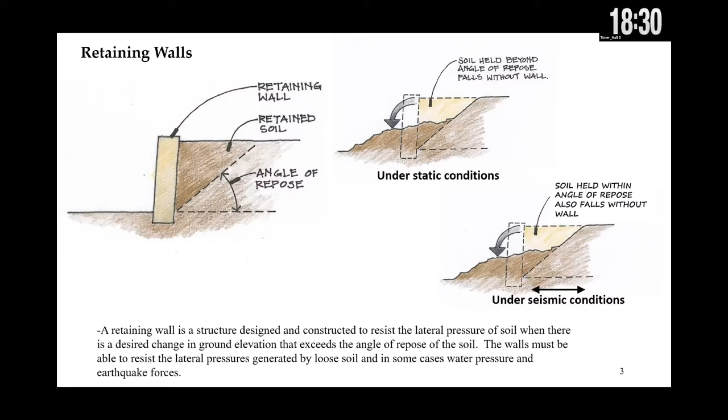Now coming to the static forces acting on a retaining wall, I am showing you a very simple example of a retaining wall where you have different kinds of forces acting. One of the major forces is soil pressure. The soil being retained by the wall actually tries to push the facing of the wall. Because of that, you have lateral earth pressure acting. Typically, as per Rankine's theory, we assume the distribution of this pressure to be triangular.

If you want to find the resultant force acting on the wall due to soil pressure, we take the area of this triangle, half of base into height, and it acts at a height of h/3 from the base. If you have some surcharge acting on the retaining wall, the resultant will be a rectangular distribution with magnitude equal to the coefficient of earth pressure into the amount of uniform surcharge pressure, equal at all elevations, and the area of this rectangle gives the resultant thrust due to the surcharge pressure. And if you have live loads acting on the retaining wall, you need to assume the Boussinesq or Westergaard stress distribution theories.

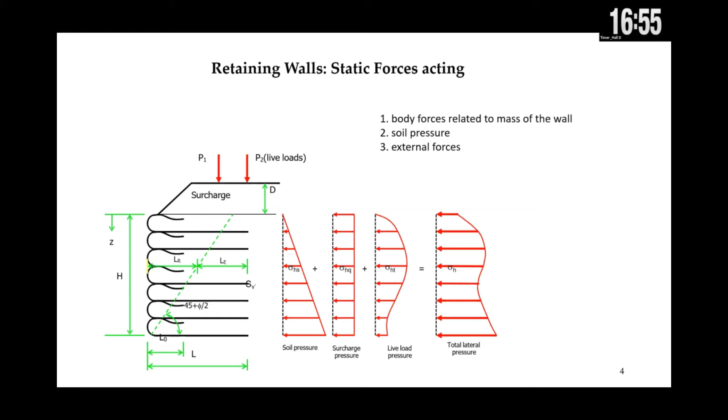We derive the earth pressure distributions below the live loads, and we compute the resultant thrust due to these live loads. Then we calculate the total pressure as a combination of all these pressures.

When we have seismic forces, the extra force that comes onto the retaining wall is due to the horizontal and vertical forces from the earthquake. Usually in a pseudostatic analysis, we take the horizontal force as kh into W, where kh is the horizontal seismic coefficient and W is the weight of the soil wedge, which is the failure or active wedge. The vertical force will be kV into W, where kV is the coefficient of vertical acceleration.

Now what happens with a reinforced retaining wall? If you do not have reinforcement, in most cases these horizontal pressures push the retaining wall forward - one due to soil pressure, one due to live load, another due to surcharge pressure - and on top you have the seismic force pushing the wall. You need to find a mechanism to hold this wall back.

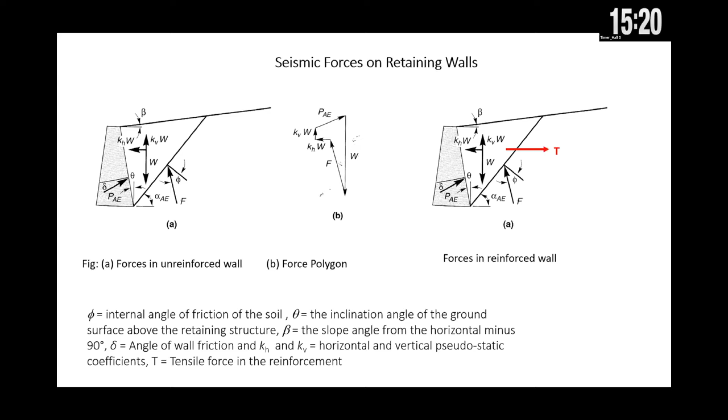This is possible if you include tensile elements into the retaining wall in the form of reinforcement. With layers of reinforcement embedded into the backfill, you can compute the total tensile force, which will try to push the retaining wall back into its original position. This is where reinforcement comes into the picture for seismic stability of a retaining wall.

Now, how does an earthquake force act? Earthquake force is actually an inertial force. Since any structure is usually under stable equilibrium, the earthquake force comes and shakes it at the ground level, and the structure has its own rigidity or inertia to oppose this movement. Because of this, the components of the structure are subjected to different levels of displacement - this is what we call the inertial force effect.

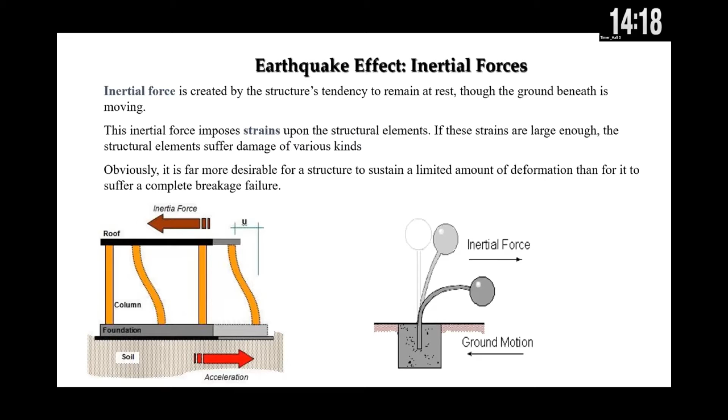To sustain this inertial force due to earthquake, the structure has to be as flexible as possible. If the structure is extremely rigid, it will undergo enormous displacements, whereas if it is flexible, the displacements will be limited, and the structure will have the flexibility to sustain the deformations.

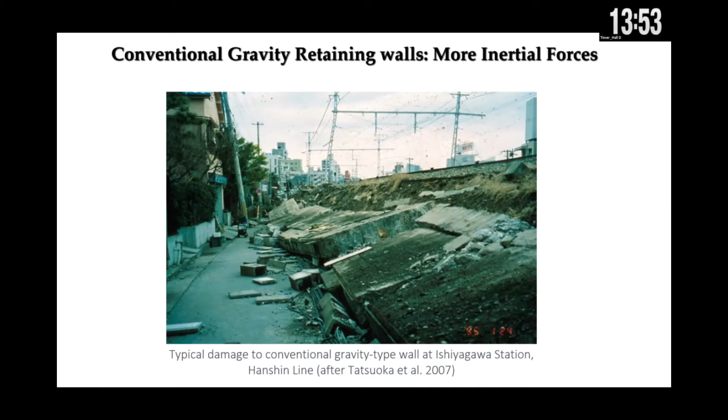This is a picture of a conventional type gravity retaining wall in Japan, which was damaged severely in 1995 because of an earthquake. Conventional gravity retaining walls are extremely rigid structures and are not able to displace under the influence of earthquakes - they oppose the deformations, which is why they undergo brittle kind of failure.

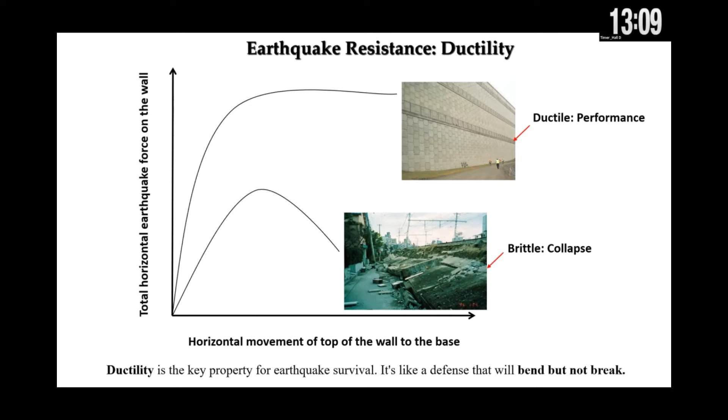So ductility is the key property for earthquake survival, and most reinforced retaining wall structures are extremely ductile compared to conventional gravity type retaining walls.

Take a GRS wall, short for geosynthetic reinforced soil wall. A GRS wall reacts to earthquake in a very flexible manner. This is analogous to a ship floating on a wave - in an ocean or sea, if a huge wave passes and the ship is passing, we can think of this boat actually moving on the wave, and it moves along the wave. When the wave recedes, it comes back to its equilibrium position.

A similar thing happens in the geosynthetic reinforced soil wall. When an earthquake passes through the GRS wall, it flexes and undergoes deformations, but these deformations are contained within the structure because it is an extremely flexible structure. Once the earthquake passes, it comes back to its original position.

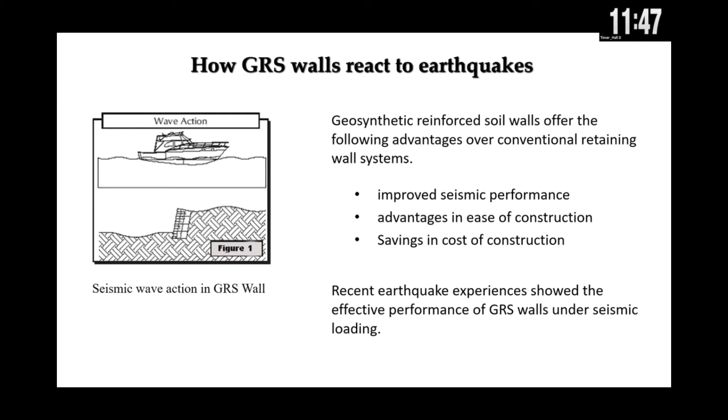So geosynthetic reinforced soil walls have main advantages of improved seismic performance and ease of construction, and also a lot of savings in cost because we are using polymers instead of cement and concrete. Many recent earthquakes show that geosynthetic reinforced soil walls have performed extremely well under seismic conditions.

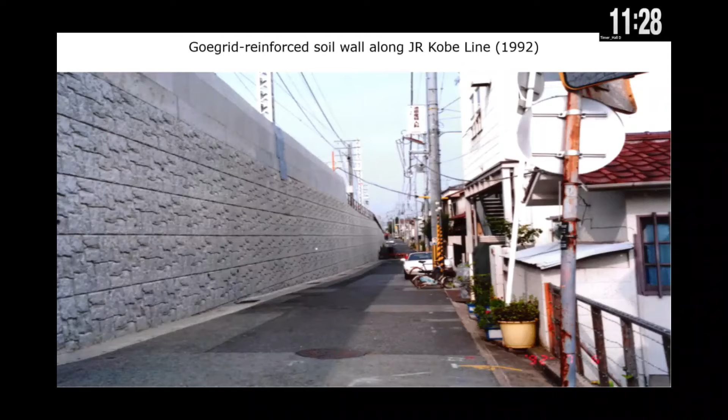One such example is the Kobe earthquake of 1995. There is a geogrid reinforced retaining wall, shown in this picture, which was built for 300 meters long using geogrids, and you can see the panel facing at the front.

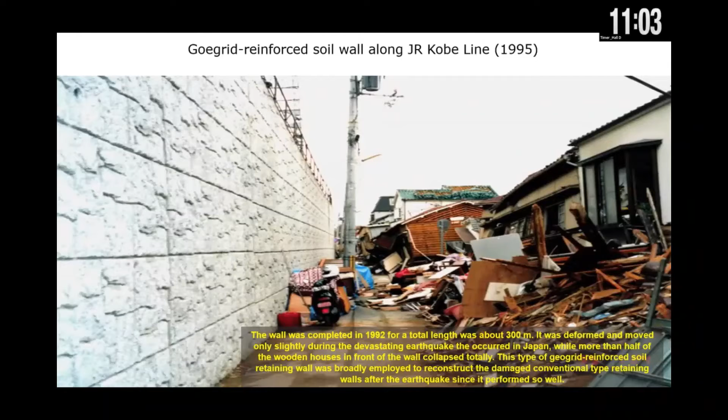So in 1995, there was a devastating earthquake which hit this area, and you can see that all the surrounding buildings collapsed, but the retaining wall, which is made with geogrids, is completely safe. It has undergone very little damage during this earthquake.

This witnesses the seismic performance of reinforced soil structures. Among the studies on seismic response of geosynthetic reinforced soil walls, you have reduced scale model studies, including centrifuge and shaking table studies, field studies, and numerical studies. In this lecture, I will concentrate only on the reduced scale model studies, specifically shaking table studies, which are available in our lab.

In a centrifuge, generally you have NG conditions, because of which you can simulate the field stress conditions exactly in a laboratory model. This is because of the acceleration at which the model rotates, which creates centrifugal forces, due to which the stress conditions within the model are increased several times to be equal to the stress conditions in a prototype.

But in a shaking table model, you have 1G conditions, that is, you are conducting experiments in one gravity condition. So the stresses in the model will not be equal to the stresses in the prototype. To get the stresses in the prototype, you need to use some scaling laws so that you can extrapolate the results from the shaking table studies to field conditions.

Centrifugal studies are very good because they are NG model tests, but they also have serious limitations, like the acceleration field may not be uniform within the model, and there could be grain size effects affecting performance. Shaking table studies, as I mentioned, are 1G model tests, but there are more shaking table studies reported in the literature than centrifuge tests, simply because you can create bigger models in a shaking table compared to a centrifuge. Creation of the model and managing instrumentation is also much easier in a shaking table.

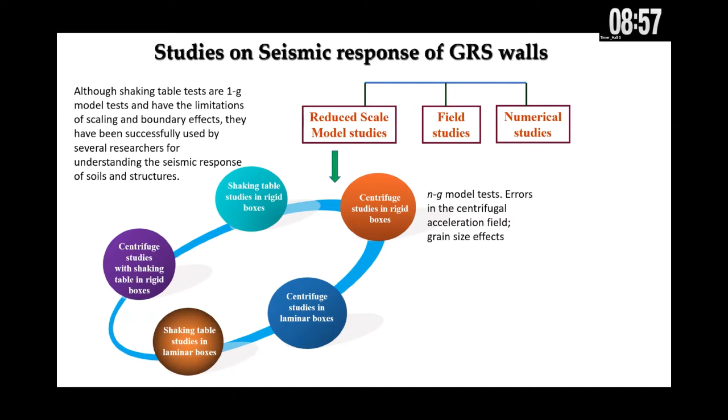All said and done, centrifuge modeling has its own advantage because you don't have to use any scaling factors like in shaking table studies.

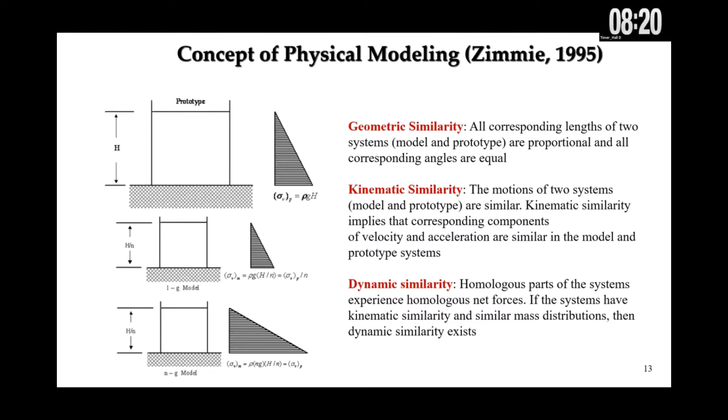The concept of physical modeling, explained by Zimmie in 1995, states that an exactly similar model is created in the lab when three conditions are satisfied. One is geometric similarity, which means the linear dimensions are equally scaled. Kinematic similarity, in which the motions are exactly similar. And dynamic similarity, meaning homologous parts of the systems, both in model and prototype, experience homologous net forces, which is possible if you have kinematic similarity and equal similar mass distributions.

So if you have shaking table model studies, how do you create scaling laws so that the results can be extrapolated to understand the performance of actual prototype structures in the field? There is this scaling factor. A length scaling factor can be defined as the length of a linear dimension scaling factor, which is length of the model by length of the prototype. It's a very simple geometric scaling.

If you want to create a similar scaling factor for force, you go with the dimensional parameters, like force equals gamma into V. So the force scaling parameter would be gamma V of model by gamma into V of prototype, but gamma should be the same for model and prototype. So technically V has dimensions of volume, which is a linear dimension cubed. So the length scaling factor should be multiplied 3 times on itself to get the force scaling factor. This is how you create scaling laws from the basic laws of physics and motion.

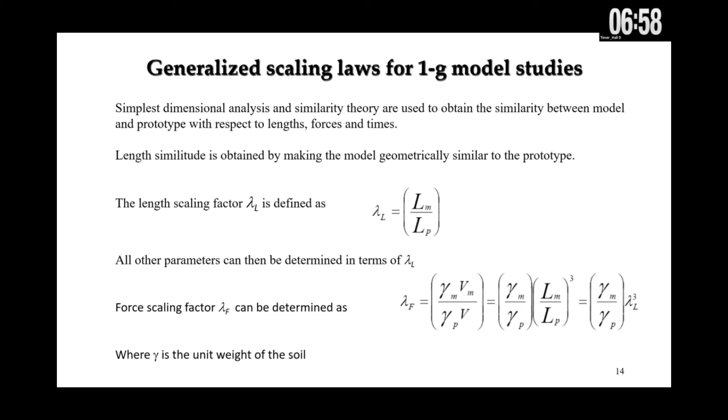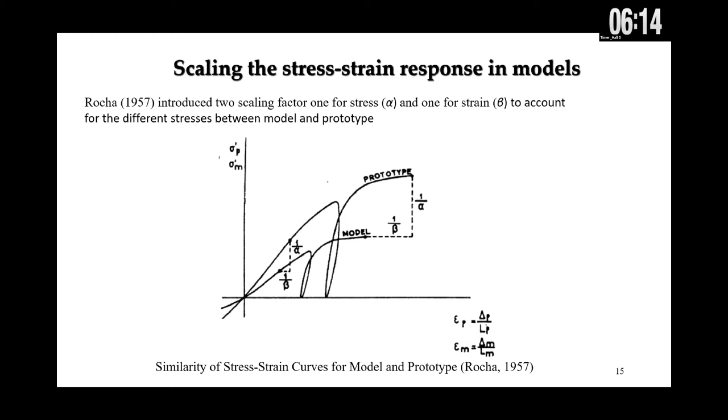There is also a scaling law proposed by Rocha for the stress-strain response of model and prototype. Rocha created two scaling factors: alpha for stress scaling and beta for strain scaling. If you have a stress-strain response under cyclic load for model and prototype, stress and strain in the model are related by alpha, stress in the model and stress in the prototype are related by alpha, and strain in the model and strain in the prototype are related by beta. But this has not become very famous because most of the time this is not such a straightforward linear difference in the scaling of stress and strain between model and prototype.

So the other theory is proposed by Scott. This is a very, very interesting theory based on the critical state of soils.

A critical state or steady state of a soil is the state in which the soil will be undergoing deformation at constant effective stress, constant volume, and constant shear stress. If you have such a critical state, and if you have a void ratio in the model and prototype managed such that they are at equal difference from the steady state, then they both will have the same stress strain response. This is a very interesting theory.

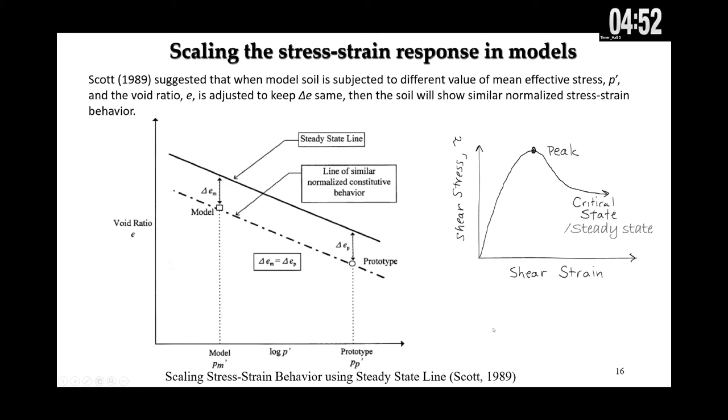If you see this in the plot, you have the steady state line on E versus log P prime. The model and prototype response is plotted exactly parallel to the steady state line, and the difference in void ratio between the model and the steady state line, and between the prototype and the steady state line, is exactly the same. In such a case, the stress strain response of the model will be the same as that of the prototype, which was proved by many other researchers in later days.

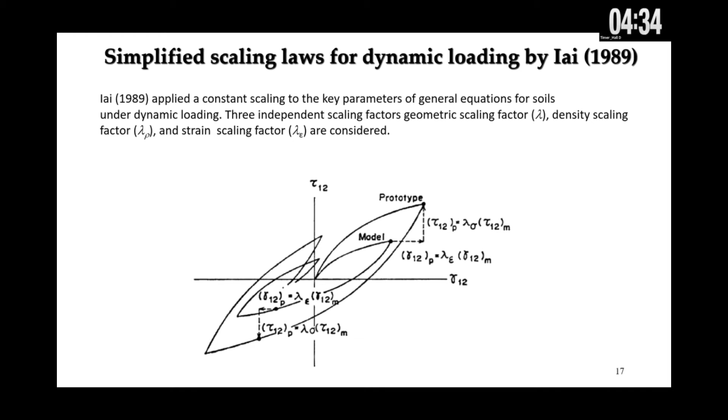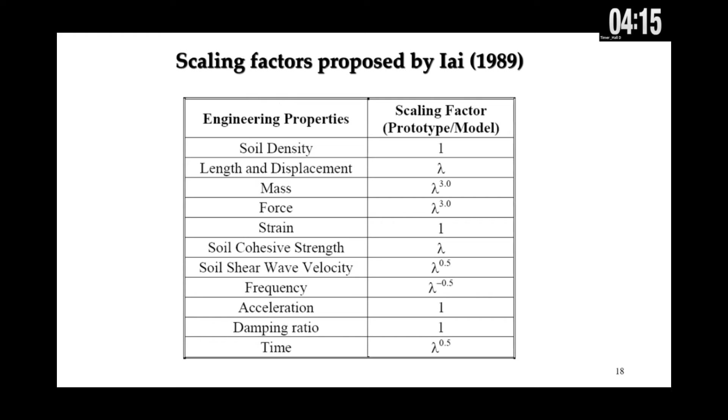The most simplified scaling laws were proposed by Iai in 1989. These are based on the hysteresis response of model and prototype, and also on basic physics and laws of motion. These are the final scaling factors proposed by Iai, where density, displacement, mass, force, strain, and other parameters including acceleration, frequency, and damping in the prototype are extrapolated from the model using a scaling factor. Lambda is the linear scaling between model and prototype.

When we talk about reinforced retaining walls, it's also important to scale the stiffness of the reinforcement. It's not as straightforward as other parameters, because the reinforcement stiffness is governed by the strain at which we are calculating the stiffness, not by the ultimate tensile strength of the reinforcement, because the stresses within reinforced retaining walls are very small compared to the ultimate tensile strength the reinforcement band can be subjected to. So we need to be very careful with the strain levels at which we are operating.

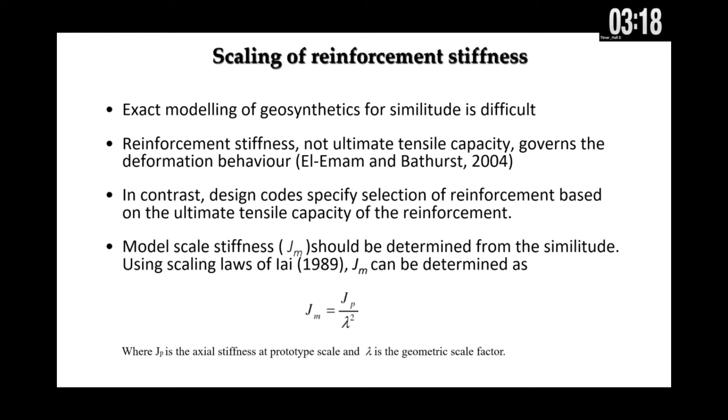The model scale stiffness can be obtained from the stiffness of the prototype divided by lambda square, where lambda is the linear scaling. This was proposed by El-Emam and Bathurst in 2004.

Another important thing to consider while doing physical modeling using a shaking table is creating a laminar container. Usually, if you carry out your model test in a rigid container, you have inherent problems, like reflection of waves at the boundaries, side frictions that affect measurements of stresses, forces, and displacements, and resistance to deformation of the soil. The soil will not be moving in its natural state inside a rigid container.

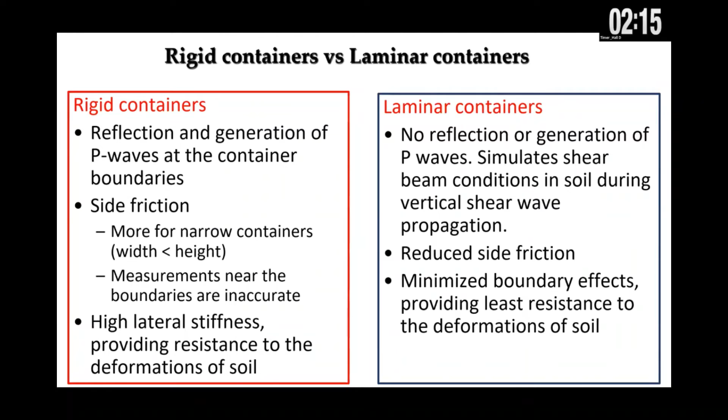To avoid these limitations, researchers have created laminar containers, in which the soil is free to move on its own accord and the side walls do not create much friction to the movement of the soil. I will not say zero friction, but it is much minimized compared to rigid containers, and boundary effects are also minimized.

Another important consideration is how you select the ground motion in a shaking table study. People use sinusoidal motion, stepped waves, different kinds of waves, and also actual ground motions captured from different earthquakes across the world. You can use any of these ground motions, and the most popular form is a sine sweep.

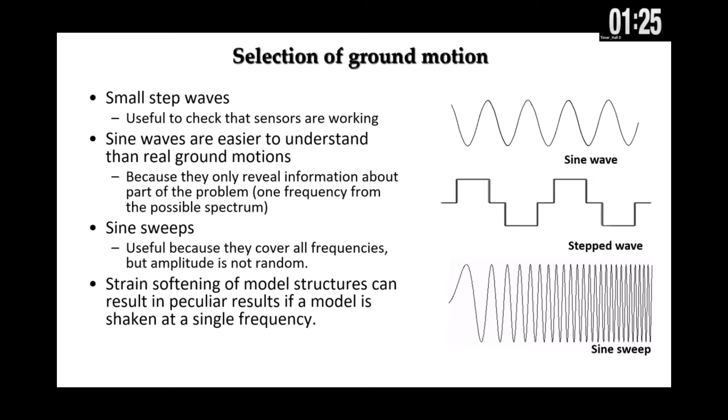In a sine sweep, you subject the reinforced or any soil structure on the shaking table to a ground motion in which the frequency is continuously increasing. It starts with a very low frequency, as you can see in the picture, and keeps increasing until it reaches a very high frequency. In this way, you can also find the fundamental frequency of the structure being tested in the model test. So this is the introduction.

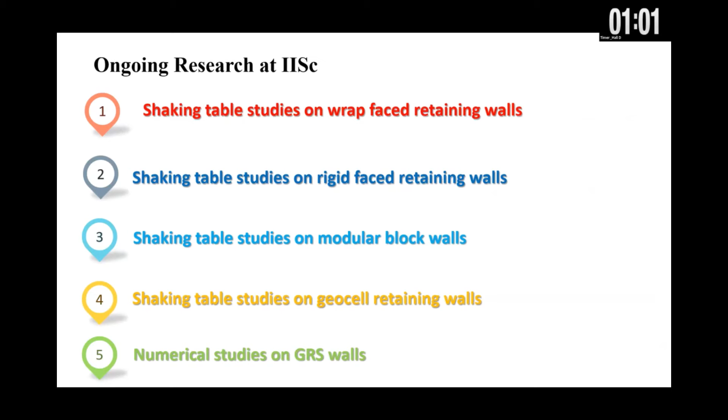From here, I move on to describing the ongoing research at IISc in this area. We have carried out shaking table studies in our lab on different types of retaining walls, including wrap-faced, rigid-faced, modular block, geocell walls, and geosynthetic reinforced soil walls. For completeness, I will show you what these different types of retaining walls are. A wrap-faced retaining wall is a wall in which you do not need any additional facing.

The reinforcement, either geotextile, geonet or geogrid, is wrapped around each lift of this retaining wall, creating one complete layer. You don't need additional facing since this acts like facing plus reinforcement.

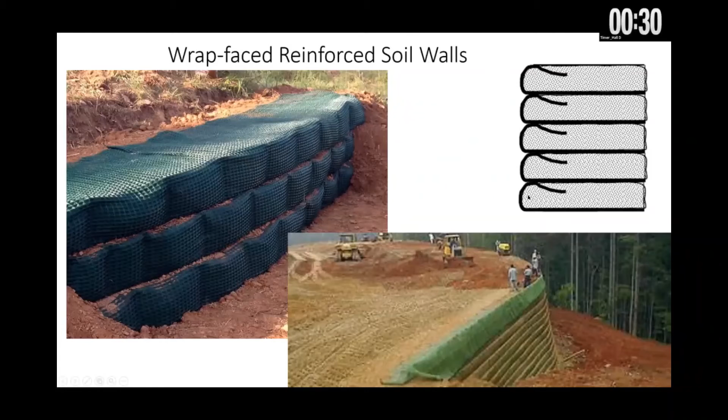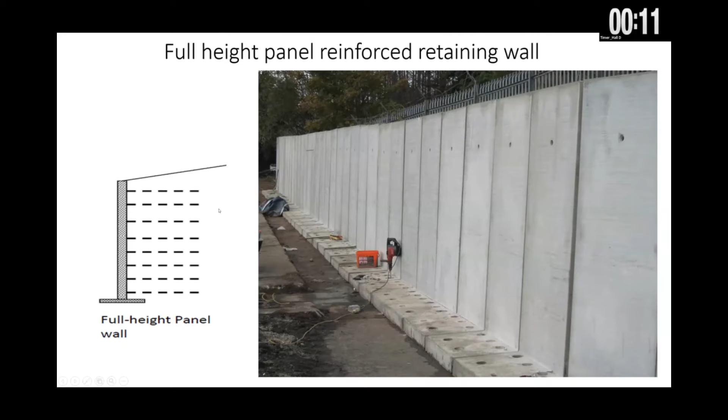A full height panel reinforced retaining wall uses concrete panels as facing for the full height. Tatsuoka and Tateyama from Japan have done extensive work on these types of retaining walls, which have reinforcement inside, either grid or textile.

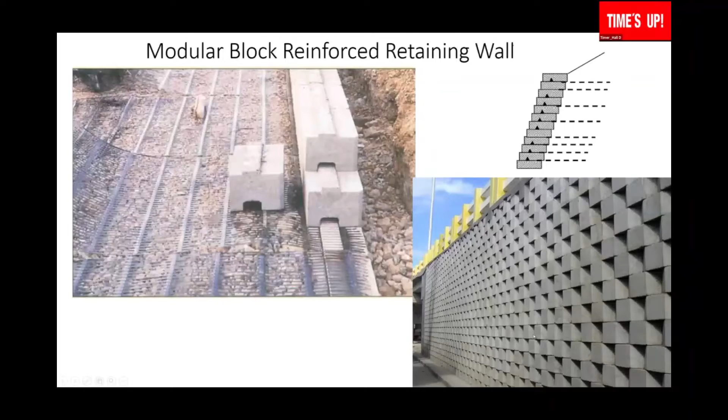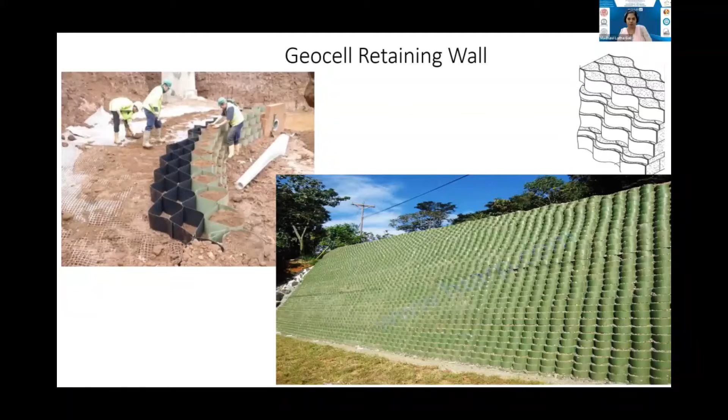A geocell retaining wall is made up of geocell facing, where layers of geocell are spread and filled with soil, then retained backfill. The facing has this stack of geocells creating the entire facing for the wall. It also has the advantage that you can grow vegetation on these pockets of geocells to cover the entire area and provide additional reinforcement through the roots of the vegetation.

Coming to our shaking table, it's a 1 meter by 1 meter shaking table which can hold a load of 1 ton, with frequency range 0.05 hertz to 50 hertz. You can test up to 2G accelerations, and amplitude is plus or minus 200 millimeters.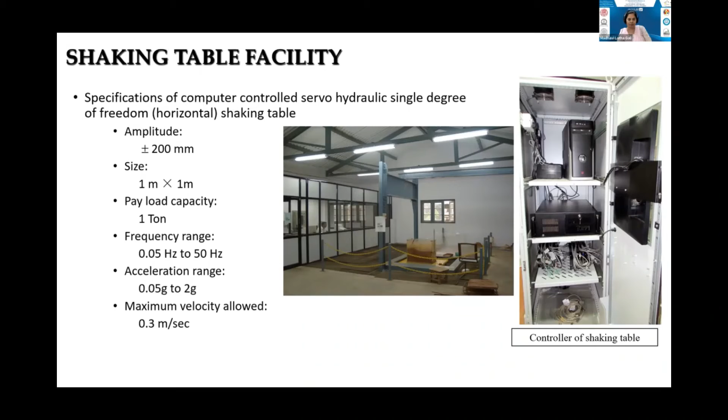Since you have these roller bearings, the motion of these panels with respect to each other is very smooth. The soil inside the retaining wall, inside this laminar box, moves in a free manner compared to a rigid retaining wall. It is a one-dimensional shaking table, or 1 degree of freedom, so it can only move in the horizontal direction.

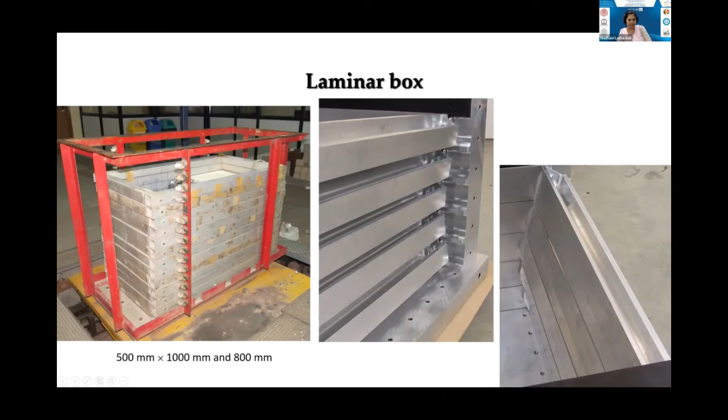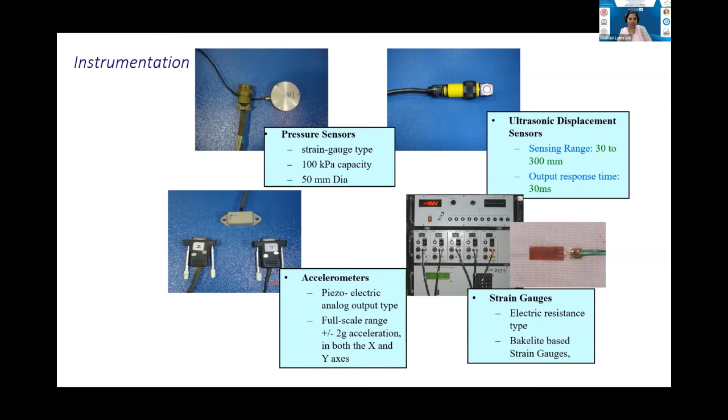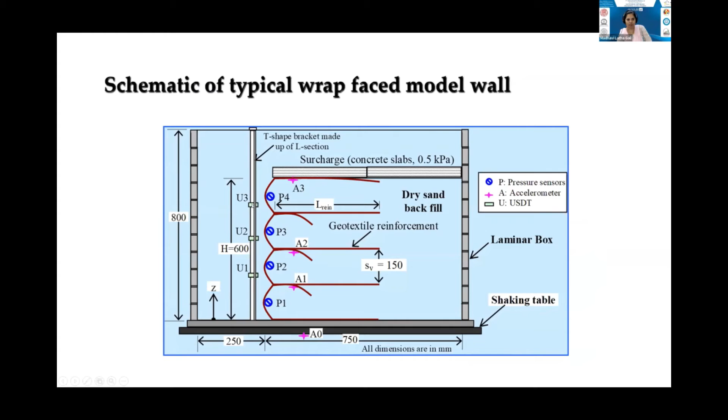This is a schematic diagram of the wrap-faced model wall we have created. You have these stacks as I already explained, with pressure sensors measuring the pressure inside the wall, and accelerometers A1, A2, A3 where you measure the amplification of acceleration at different levels, plus ultrasonic displacement sensors placed away from the facing. The procedure is very simple.

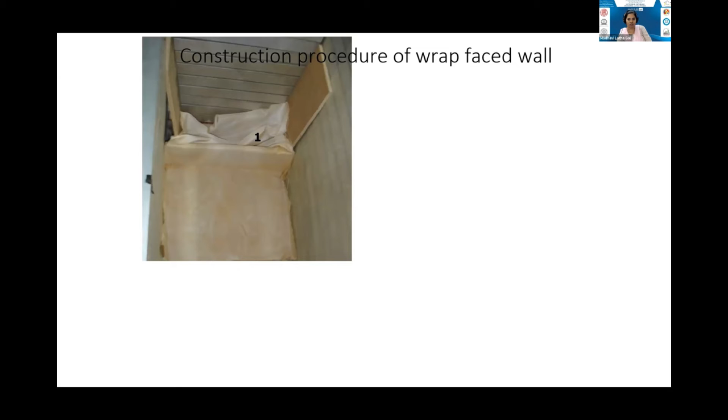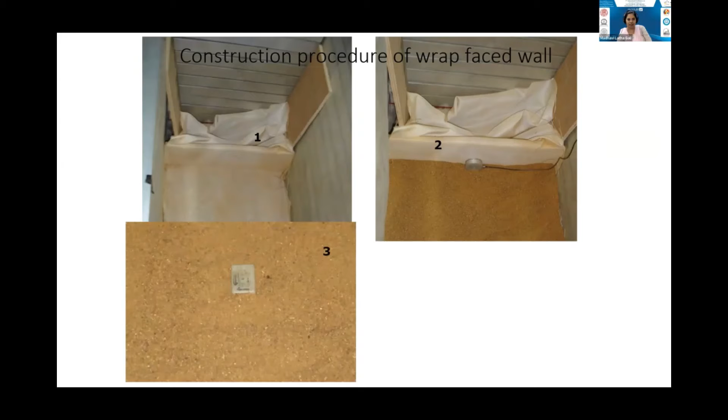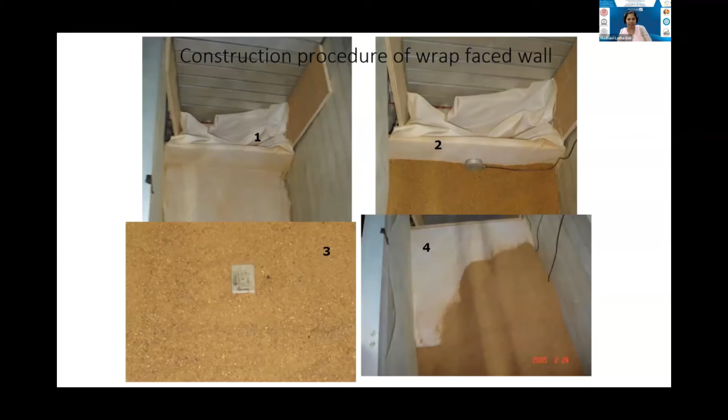For construction, woven geotextile is used for reinforcement. You keep one layer of this geotextile, and on top you fill sand up to the height of one lift, and embed your pressure sensors at the required elevation, along with an accelerometer, also embedded inside the soil. Then you finish the layer and wrap it around carefully, with the textile wrapped around the soil to a certain length. Sand pluviation technique is used to fill the soil so you get uniform relative density within the model.

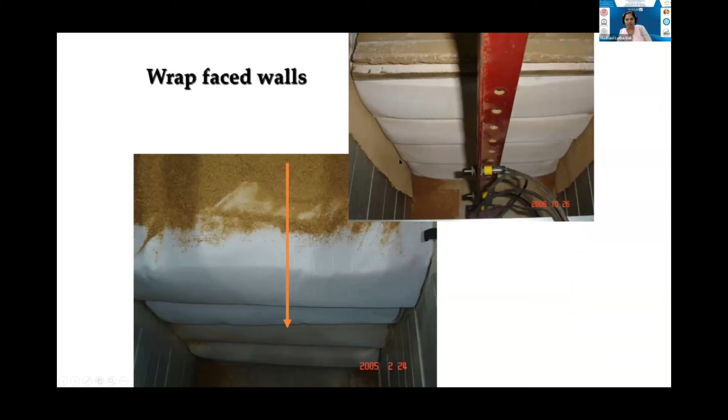This is a finished wrap-faced model. The yellow ones you see here are the ultrasonic displacement sensors.

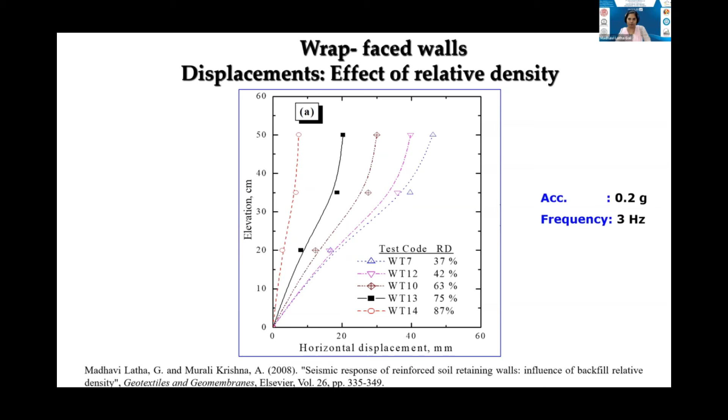This test is carried out at a very high earthquake scenario, where your frequency is 3 hertz and acceleration is 0.2 g.

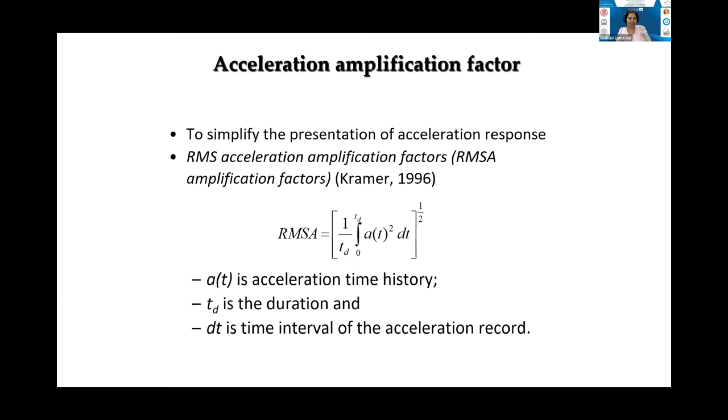To simplify the presentation of acceleration amplifications, we have used RMS amplification factor, the root mean square acceleration, a very simple parameter. You have a number of cycles in which you measure the acceleration, with positive and negative values. To average the acceleration for the overall test at any elevation, you take the square of the acceleration and integrate it for the entire duration, zero to td. This gives you the mean square acceleration, and then taking a root gives you the absolute value of average acceleration, representing the average acceleration to which the model is subjected.

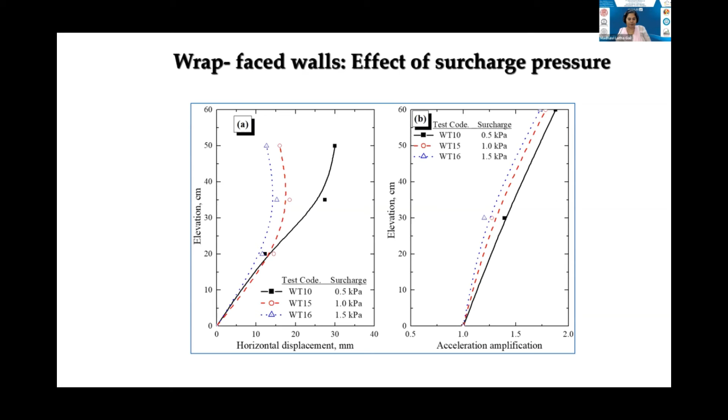Also, with increasing number of reinforcing layers, like 3, 4, 6 layers, you can see the deformations changing from 90 mm to almost less than 10 millimeters. So the effect of reinforcement is very clearly seen in this picture.

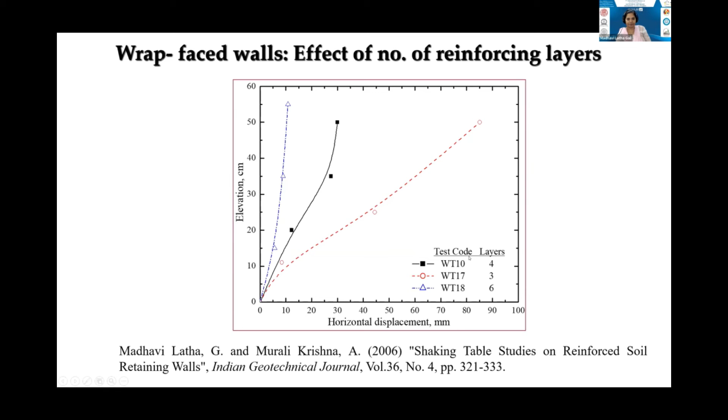When designing a reinforced retaining wall, the general guideline is the reinforcement length should be 0.7 times the height so that you avoid pull-out failure. But under seismic conditions, the 0.7 parameter will not work, as shown in this plot.

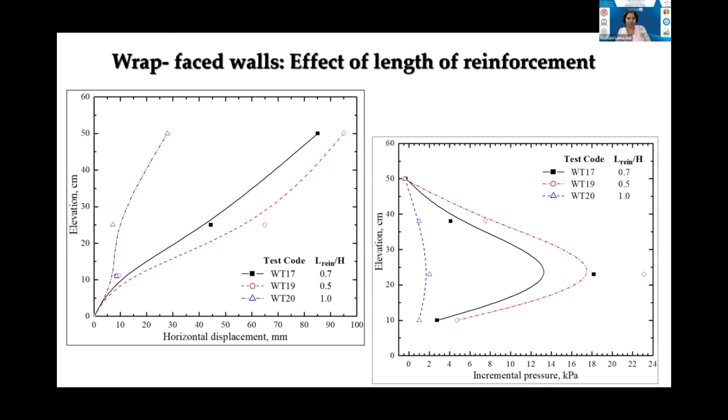When your reinforcement length is 0.5 times h, 0.7 times h, or 1 h, you can see the difference in displacements and earth pressures inside the wall. Even at 0.7 times h, deformations are as high as 85 millimeters in the model. When you use length equal to the height of the retaining wall, you reduce the deformations to a much lesser value. So the static and dynamic design of retaining walls can be completely different in terms of reinforcement.

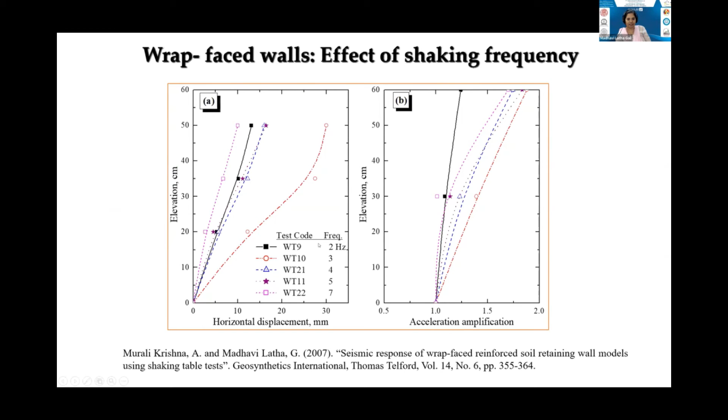The other set of model tests are on rigid faced walls. Here, instead of a wrap, we have a rigid wall. I'll show you a photograph which makes it clearer. You have stacks of steel panels which are rectangular and hollow, stacked inside steel guide rods, pushed in so that you create a full height rigid wall, extremely rigid and not flexible at all. Inside, you create the retaining wall, which can either have reinforcement or need not have reinforcement.

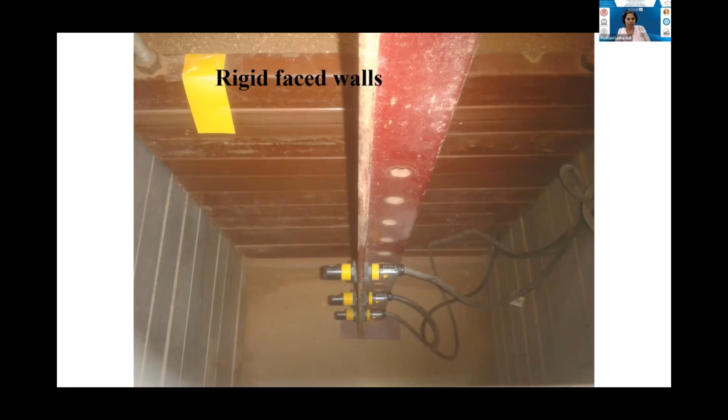The comparison between unreinforced and reinforced retaining walls, with variation in relative density of the backfill soil, is shown here at an acceleration of 0.1 g and 1 hertz - a very moderate earthquake. You can see that for unreinforced retaining walls at 37% relative density, the deformations are very low, 2 to 3 mm. Even though the wall is unreinforced, since it's a rigid faced wall, deformations are not as much as the wrap faced walls. But with reinforcement, horizontal displacements are much less - less than 1 mm, almost nil for a rigid faced retaining wall.

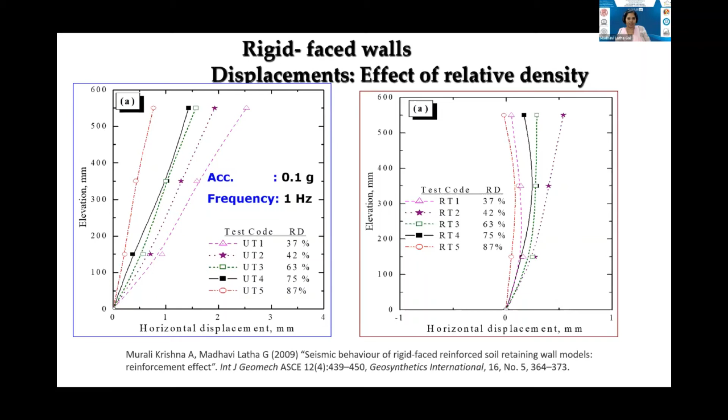This is an excellent method of constructing a reinforced wall. Most Japanese retaining walls are rigid faced, full height retaining walls with geogrid reinforcement inside.

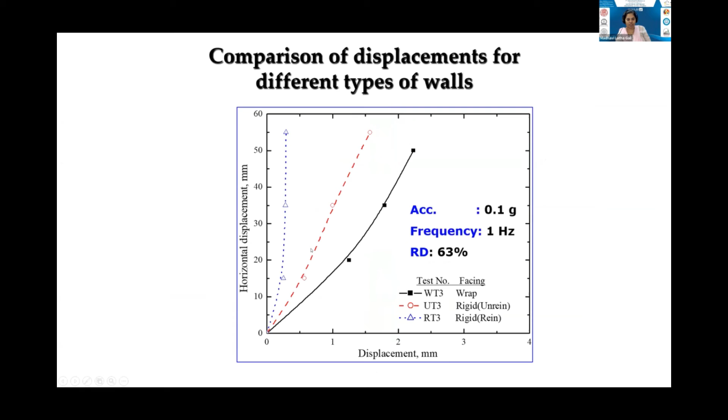This is another picture showing accelerations varying in a rigid faced wall, and comparing displacements of different wall types - wrap faced, rigid faced, and rigid reinforced. Rigid faced reinforced retaining walls perform much better seismically, with displacements much lower, almost insignificant.

This is the effect of shaking frequency again, and reinforcement type - we used different types of reinforcement. Since this is a reduced scale model, the reinforcement stiffness also has to be reduced. So BX is a biaxial grid, UA is a uniaxial grid, plus a geonet and a weak geotextile - all these different materials are used and their performance is shown here.

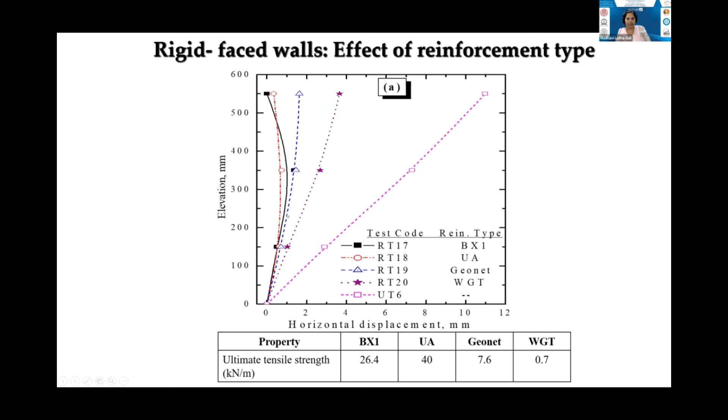So unreinforced soil retaining wall has the maximum deformations, whereas all reinforced retaining walls showed excellent performance in terms of reduced deformations. For segmental retaining walls, we actually cast these modular blocks in our lab with reinforcement - you can see there is a lip here.

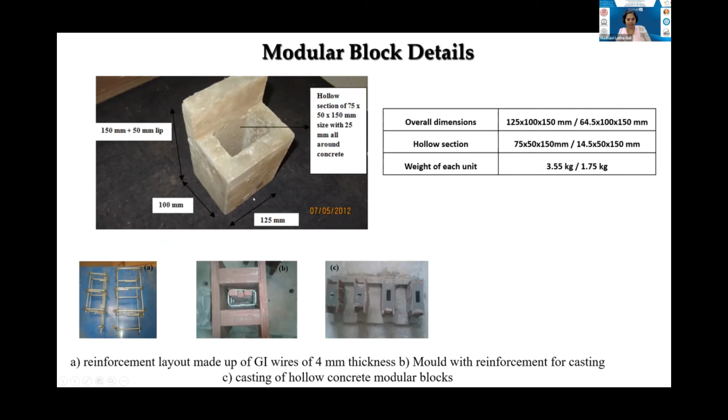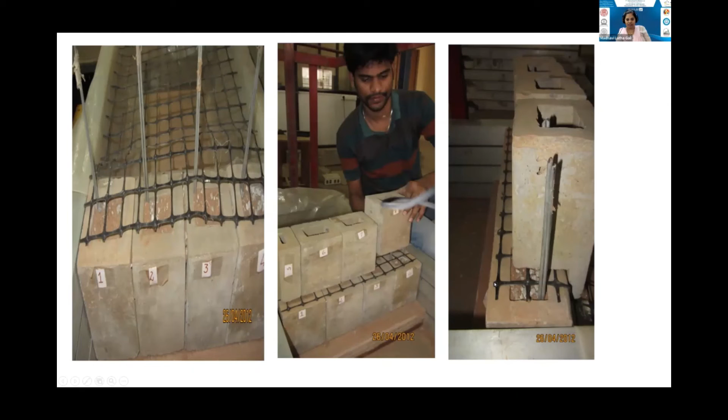This allows for easy fitting of successive blocks of modular concrete blocks, one onto the other, so that you create a facing for it. You can read about the details of this in our papers if you want more details on how to create these modular blocks and retaining wall. GeoGrid is used as reinforcement, and this is a finished retaining wall.

Interesting results are obtained because here we are testing modular blocks and comparing them with unreinforced and also rigid faced walls. Here we are comparing 2-layer and 3-layer modular facing walls. With the 3-layer modular facing walls at 47% relative density, which is very low relative density, you can actually bring down the deformations from 15 mm to almost 2 to 3 mm, which is excellent.

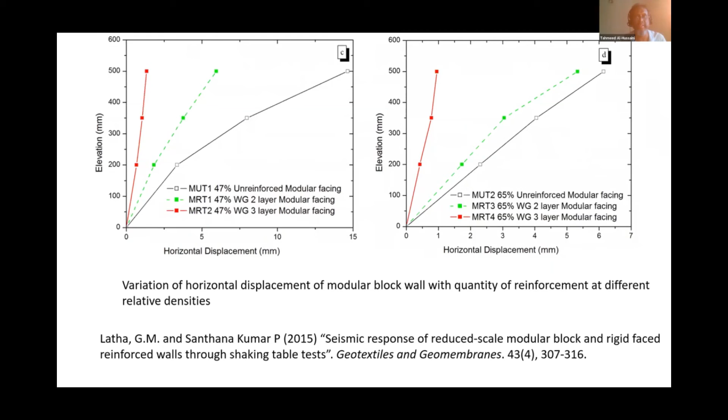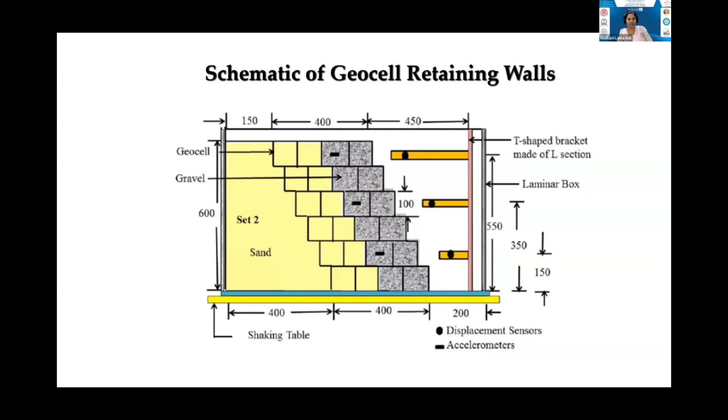Definitely, thank you. So the next set of tests are on geocell retaining walls. These are, as I already explained, geocell layers used as facing and filled with soil. The advantage of geocell reinforcement is that it not only provides additional benefits through friction interlocking, but also provides all-round confinement, membrane effect, and anchorage effect because of its geometry. So the soil within the geocell is always in a state of all-round confinement, so that the entire facing of the retaining wall is in a state of stress all the time, which opposes any lateral forces acting on the facing.

So these are models of retaining walls created using GeoNet. It's a very weak material - you can pull it apart using your hand. These retaining walls are constructed with very weak reinforcement so that you can actually use the scaling for reinforcement stiffness.

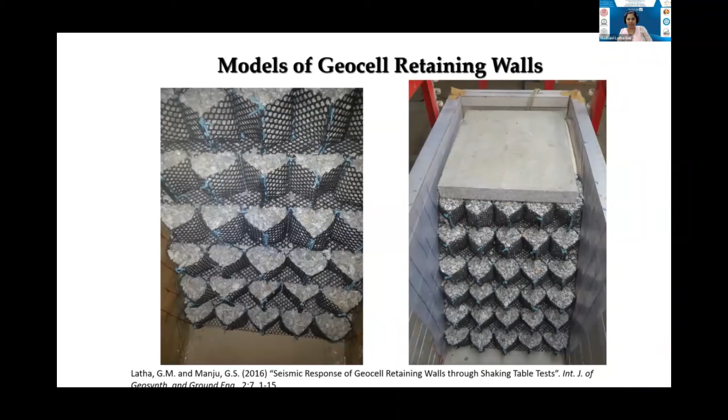So some typical results - one interesting result is that when you have rigid facing, the retaining wall movement is almost like displacement continuously increasing with wall height, whereas when you use geocell facing, the reinforcement allows for the adjustment of displacement at every elevation, so that the final displacement at any level is much, much less compared to a rigid faced wall.

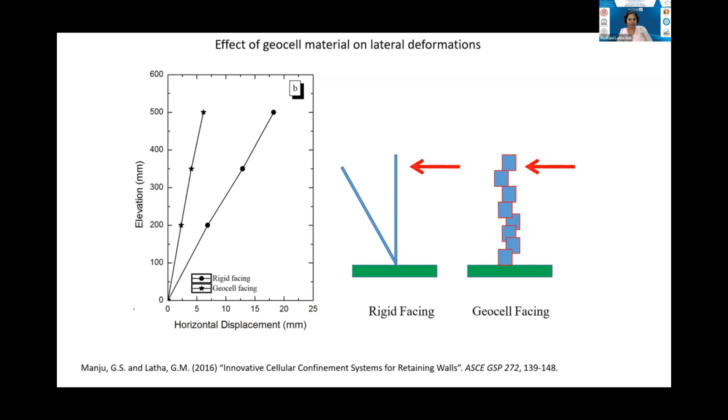Also, it has an enhanced base width and it has a setback when you are constructing it, which gives additional geometric advantage to the retaining wall, providing resistance against sliding and overturning in retaining walls. We've also created geocells using PVC, which is a very, very weak material.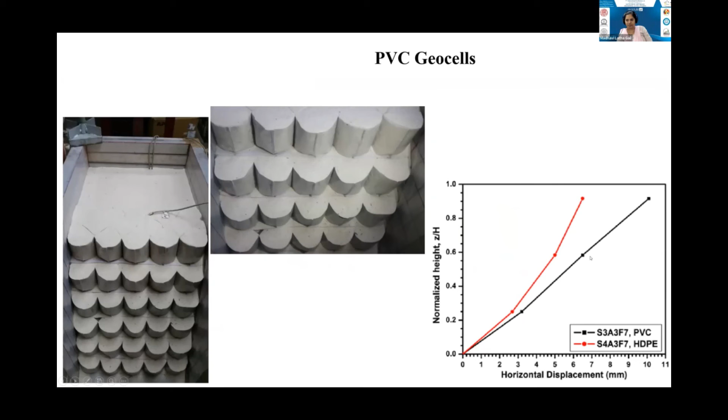The normal PVC material, which we use as overhead projector slides, used a photolamination technique to make these geocells. You can see a comparison of performance of PVC and high density polyethylene geocells.

So now how do you extrapolate these results to field retaining walls? I'm showing you a guideline table where if your model has a scaling factor of lambda L, say for example your model dimension is 1 and the dimension of the prototype is 10, that is the linear scale. The unit weight will be the same in both model and prototype. And the frequency of the model - whatever you need to use - the scaling factor proposed by Iai: the frequency of the model FM, the prototype will have 0.17 FM as per this equation computed.

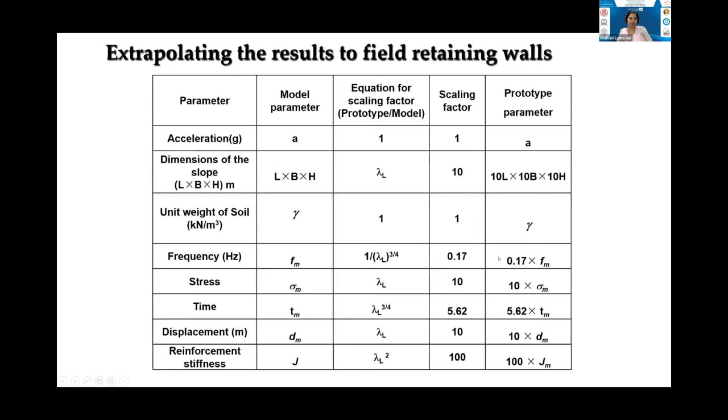So these are the parameters calculated as per Iai scaling factors, and these factors are used to give guidelines and recommendations on where these parameters can be used, and what would be the displacements, frequency, duration in the prototype retaining walls compared to the model ones.

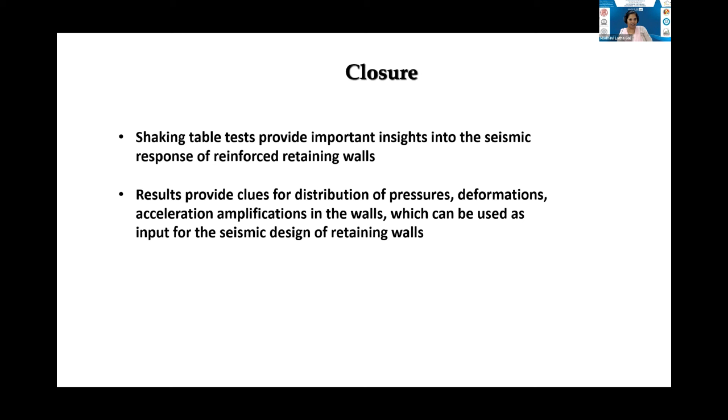As a closing statement, I would like to say that shaking table tests provide important insights into the seismic response of reinforced retaining walls. They are not foolproof - you need to be extremely careful with your scaling, quality control, materials you are using, their properties and everything. When you do a perfect test, these results provide important clues for understanding the pressure distribution and deformation. But at the same time, the disclaimer you need to add is that you cannot directly extrapolate the results of shaking table tests to the seismic response of actual structures in the field. You have to be very careful when using these results.

All credits go to my students - my first PhD student, Murali Krishna, who is a professor at IIT Tirupati now, and Santana Kumar, my MTech student, and Manju, another PhD student of mine. Thank you so much.